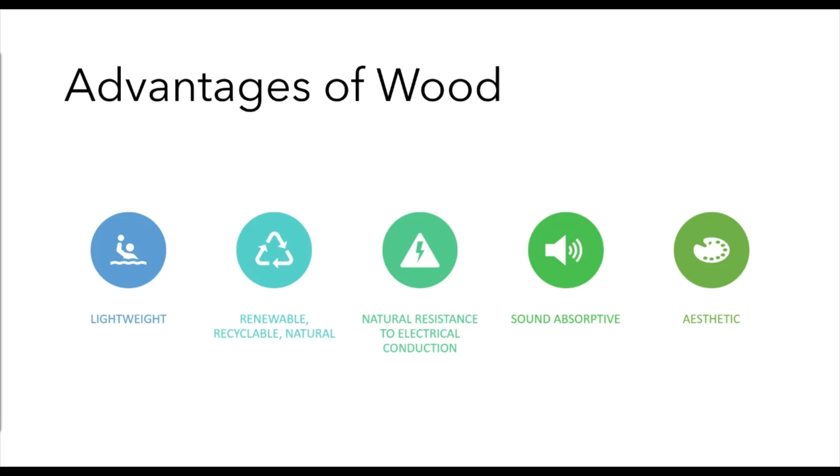when we use wood. Simply put, one also of the advantages of wood is that in terms of tensile strength, it can support its own weight better than metals, for example. What are the disadvantages naman? So, number one, even if ang advantage niya is hindi siya conduit ng electricity, it's flammable. And it's also susceptible to rot and insect damage.

And it has size irregularities. What do I mean by that? Because it is a naturally produced item, it is cut into size by machines and all that. Therefore, meron at merong tapon. At meron at merong hindi pantay or hindi true to size na production na napupunta sa atin.

Therefore, there are size irregularities, which is one disadvantage but can also be taken as an advantage in a sense na, kunwari, gusto mo ng medyo mas natural na design. So, yung irregularity ng wood mo can also be an advantage, di ba?

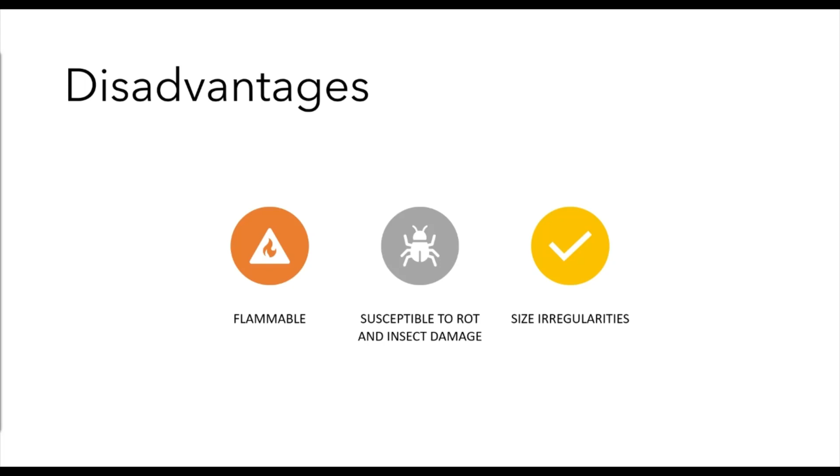Now, before we move on with other things about wood, I'd like to break down lang the difference between fire retardant and fire resistant because these are things that apply most specifically to wooden materials. Fire retardant makes combustible materials difficult to ignite. So taking into consideration wood, when you say it's a fire retardant wood, it makes combustible materials difficult to ignite. It slows the ignition, from the word retardant.

It slows the ignition, burning, or makes the flame self-extinguish. Therefore, in a sense, hindi siya umaapoy. Fire retardant yung material, meaning mabagal, pinapabagal nung chemical na yon. Therefore, in a sense, combustible pa rin yung material, pero mabagal yung pag-combust ng material because it's fire retardant. So, it slows the ignition burning.

And sometimes it makes the flame self-extinguish, as in since slow nga yung process of creating the flame, nagse-self-extinguish siya, nawawala yung apoy. So that's fire retardant. When you say fire resistant, the material itself is non-combustible. Ibig sabihin hindi siya talaga combustible. The material has a barrier against fire.

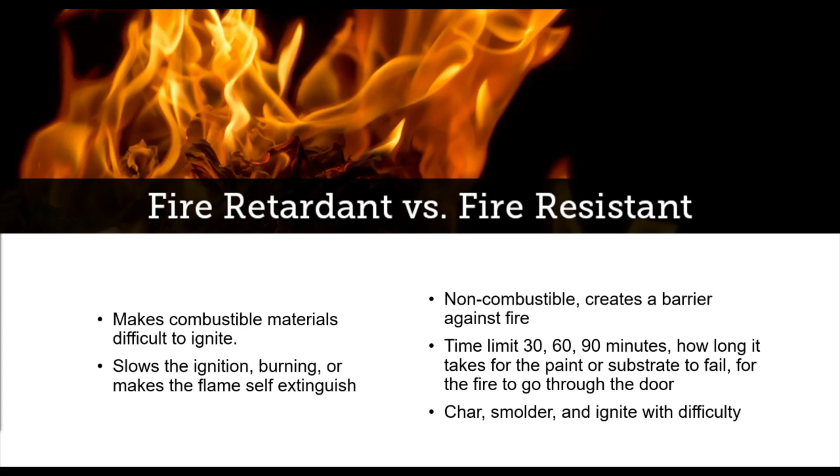Now, moving on, now that we've tackled that, wood construction materials can be classified into two categories. We have your natural wood and your engineered wood. Natural wood comprises, in a general sense lang, your hardwoods and softwoods.

While engineered woods, some of the most popular ones are plywood, blockboard, veneers, laminates, and particle boards, and your MDF and HDF, which we will discuss later on. So, engineered woods are composite wood, man-made wood, or manufactured board. So, those are other terms for your engineered wood.

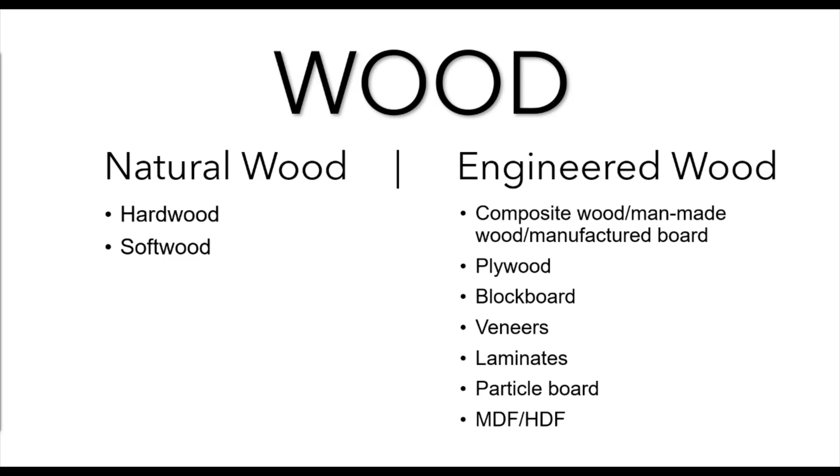Himayin natin, let's start with your natural wood classification. Your hardwood versus your softwood. Your hardwood is denser because it takes more time to form or to mature than your softwood. Therefore, hardwood is denser. And as you can see, ang nakalagay dyan, usually softer yung softwood because hindi lahat ng softwood mas malambot than the hardwood. So don't be confused sa part na yon. There are some softwood na harder than hardwood. The difference is that hardwood is denser than softwood.

Hardwood is usually darker in color. Again, keyword usually, hindi lahat, pero most. And softwoods are almost always light. Hardwood, as I've mentioned, has a slower growth rate, therefore developing more rings and therefore becoming denser. While softwood has loose grain. Grain sa wood, ibig sabihin yung parang texture niya, yung pattern na wavy-wavy. Sa softwood, mas malalaki yung spacing nun. Sa hardwood, mas dense, mas intact, mas compact, mas dikit-dikit yung mga linya. Hardwood has higher compressive and tensile strength compared to that of softwood. And yun nga, close grain for hardwood.

Now, dun sa softwood, nakalagay dyan is higher sap, meaning softwood has higher moisture content. When we say a higher moisture content, mas mamasa-masa siya. Therefore, it has higher permeability. As opposed to hardwood na lower ang sap, therefore lower permeability or yung capacity of water or other materials to pass through the wood.

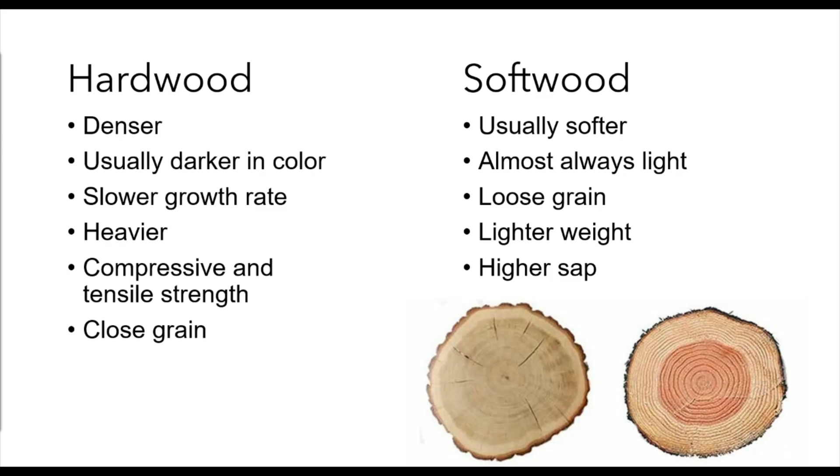Now, another term you should be familiar with in terms of wood is what we call seasoning. Wood seasoning in specific terms. So, wood seasoning is the process of removing the moisture content from wood to minimize structural problems when used in construction. The first and foremost rule ng paggamit ng kahoy is dapat hindi siya basa. Yan ang pinakakalaban ng kahoy, even when you use it na as a finish, is tubig. Therefore, seasoning is a process that removes the moisture before it is said to be fit for construction use.

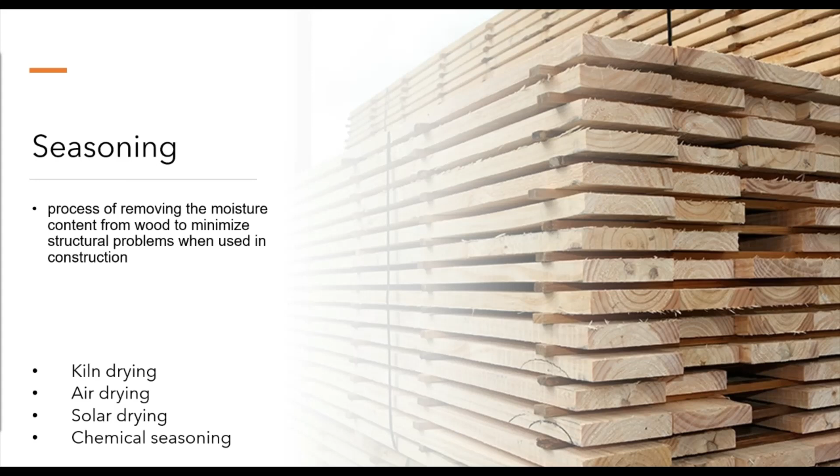Now, I've identified seasoning processes listed below. These are only some of the most used and common ones. So you have kiln drying, air drying, solar drying, and chemical seasoning.

Okay, so these are the graphs. The upper left one is your kiln drying. Ang hirap sabihin. Kiln drying method of wood seasoning. So from the word itself, kiln, ibig sabihin yan oven. So niluluto yung kahoy. In a sense, yun ang general na definition niya. Niluluto yung kahoy sa isang malaking structure na parang oven ang gamit niya. Pumapasok yung heat, lumalabas yung hot air. Ganun lang siya.

Okay, the upper right diagram is your solar drying method. So as you can see sa left niya, merong solar collector panels. And naka-enclose yung structure and then nandun nakastack yung wood sa loob ng structure para mag-dry siya. It's a mixture of air and solar energy. Ayan, solar drying.

The lower left image is what? Your chemical seasoning. So binababad siya, minamarinate yung kahoy with chemicals to treat it, to make it lose its moisture content, to make it protected against water. And then the lower right diagram is your air drying seasoning.

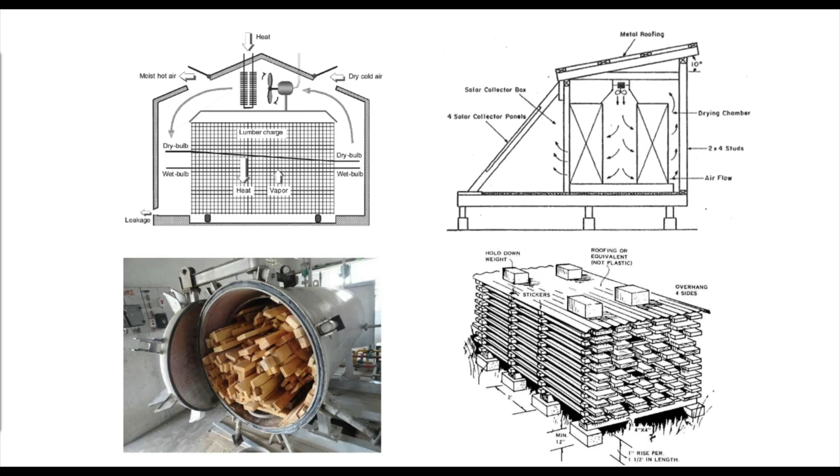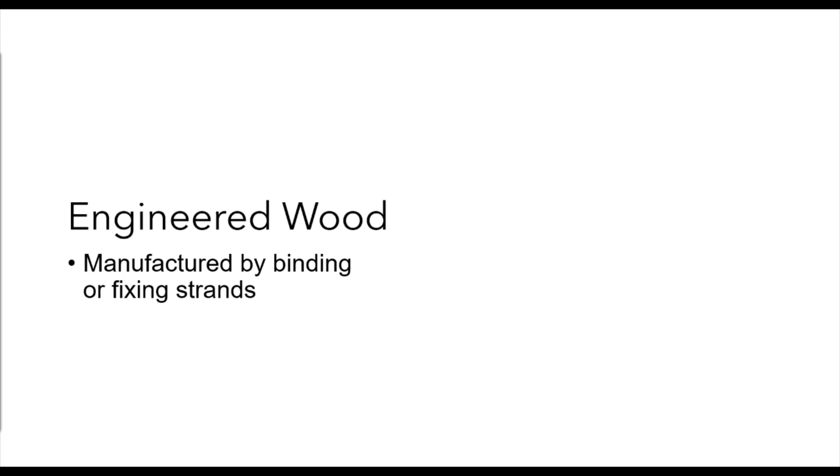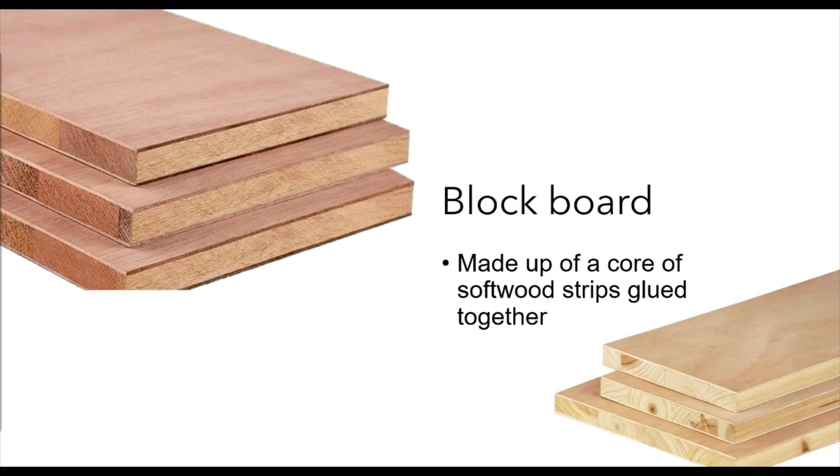Now, a sister kind of engineered wood of plywood is what we call the blockboard. Hindi blackboard na pang school, block as in bloke. It's made up of a core of softwood strips glued together. So, kung kanina yung plywood made of plies, ito block literal or strips glued together. Kita nyo naman yung difference sa itsura nila. So, yung plywood layers, yung blockboard blocks.

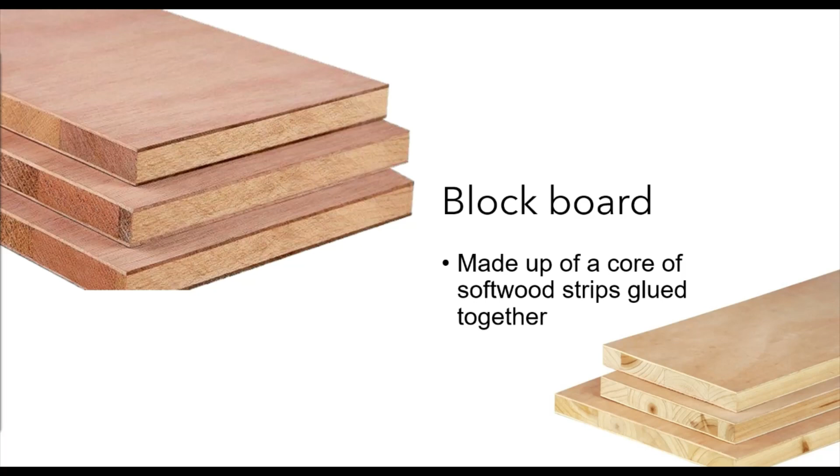Lower right image shows you a more clear or in-depth definition ng block. So, you have parang Jenga. Block 1, block 2, and then 3 and 4. And then for the upper left image, you have your block 1, ganyan.

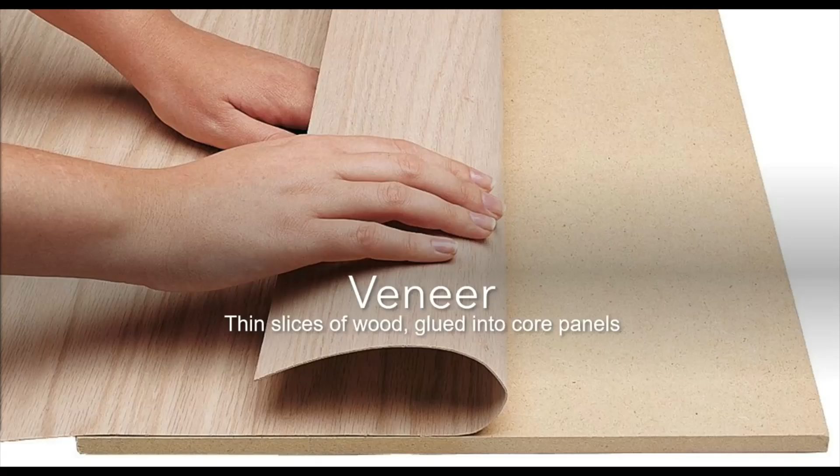The next kind of engineered wood that we will discuss would be your veneer. Veneer, simply put, is the thin slices of wood glued together into core panels. Ang veneer ay peeling. Parang ang process niya is peeling the trunk of the tree. And it's usually thinner than 3 mm, if I'm not mistaken.

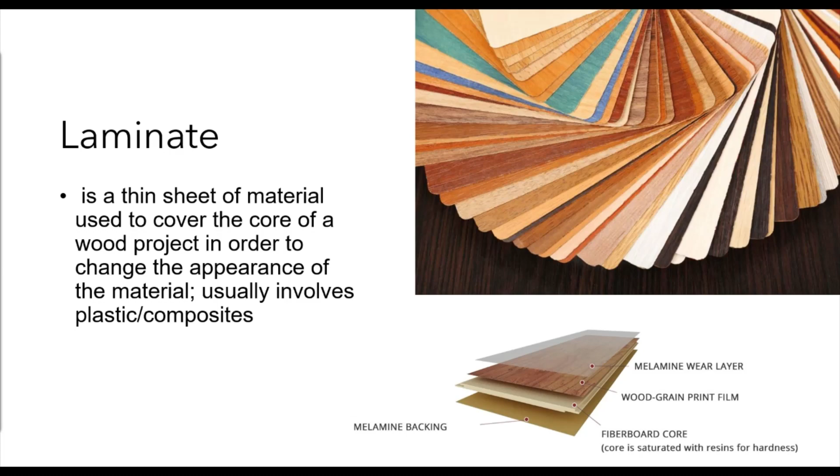The next kind of engineered wood is your particle board. It's also known as chipboard. I'm sure you've heard this. Chipboard because it came from wood chips, shavings, resin, and binders. So, mga scrap, mga tira-tira, mga kuskus, ayan. This is the material usually used for yung mga cheapo na ready to assemble na furniture. So if it's not made from MDF, which I will discuss after, it's usually made from particle board.

The problem with this is that after a few years, since wala siyang structural element component masyado except for the binders, since shavings lang siya, nagwa-warp, nagbe-bend siya over time. And hindi mo siya mapipigilan, lalo na pag nabasa siya, na mag-warp more because kuskus nga lang yung laman niya. So, that's your particle board or chipboard.

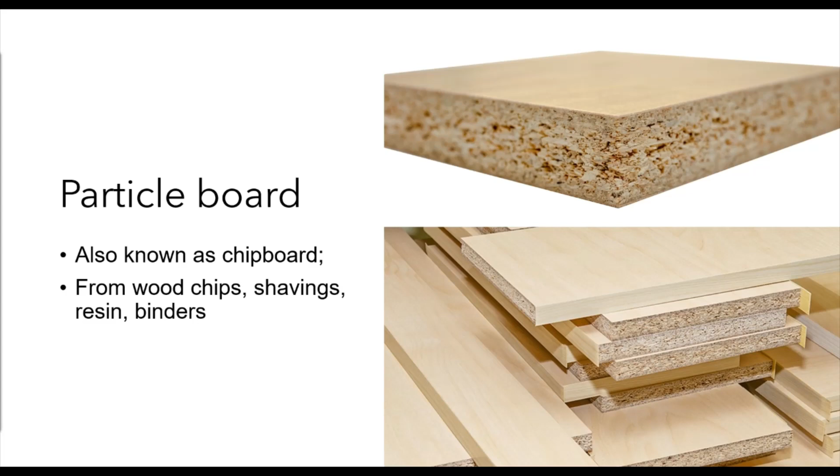Finer and more pressured intact, more, ang tawag dito, more dense ang ating MDF or HDF compared to that of the chipboard, which is why it is cheaper. So, MDF and HDF basically have very minimal differences from each other because they undergo the same process. But HDF is better for building heavy furniture that you use regularly.

HDF board for cabinets, ganyan, more than MDF boards because the wear and tear is better. Ang pag-hold up ng wear and tear ng HDF is better than the MDF. But in terms of how it is produced, there's no technicality in terms of difference. So that's MDF and HDF, and the difference of those two between your chipboard or your particle board. That's basically it for your wood section of the lecture.

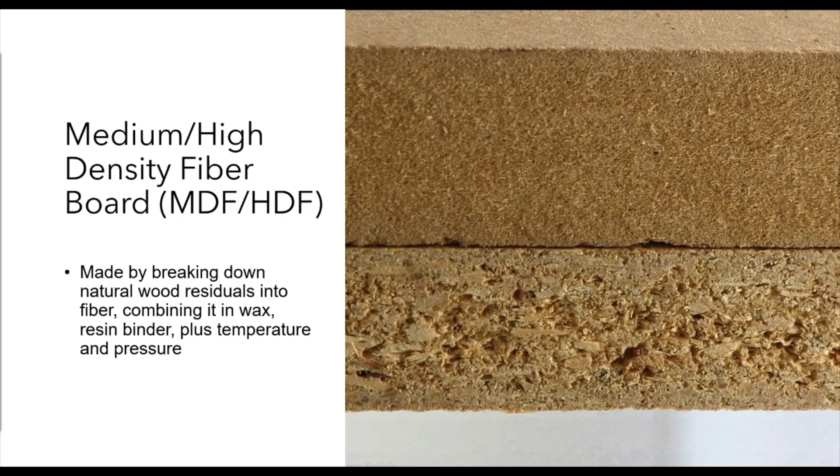Now we go to the stone section of the lecture. Stone as building material. How do we classify a good building stone? We classify a good building stone by looking at its crushing strength, its appearance, of course, as architects, its durability, its hardness, the percentage wear, the resistance to fire, texture, toughness index, and low water absorption.

Now, similar to wood seasoning, ang tawag naman po sa pag-treat o pag-customize, pag-ayos ng bato ay dressing. So, sa wood, it's seasoning. Sa stone, it's dressing. Dressing stone is the process of giving a proper size, shape, and finish to the roughly broken stones when obtained from mining or quarrying. So, dressing, inaayos, pinapaganda. Okay?

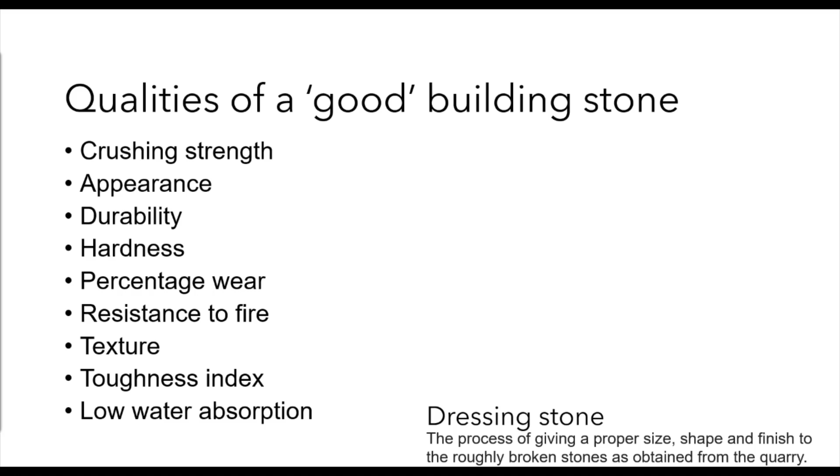Ang pinaka, ang hilig ko magpinaka. Ang pinaka-component lang ng lecture natin in terms of stone is kung saan lang siya ginagamit. So, I think stone is basically used nowadays for masonry.

Let's first define masonry. Masonry is the building of structures from individual units, which are often laid in and bound together by mortar. And the term masonry can also refer to the units themselves. Therefore, kunwari, CHB, that's a masonry unit. The masonry is the mixing of the masonry unit with the mortar. Now, based on the arrangement and degree of refinement, masonry can be classified into either rubble masonry or ashlar masonry.

Now, why are we discussing masonry agad-agad? Hindi pa nga natin na-discuss yung uses of stone as a building material. Now, you should note that stone is used two ways. First, as part of the structure, katulad ng dati, for foundations, walls, columns, lintels, arches during the Roman and Greek era, ganyan. And facework, or to give appearance to the structure.

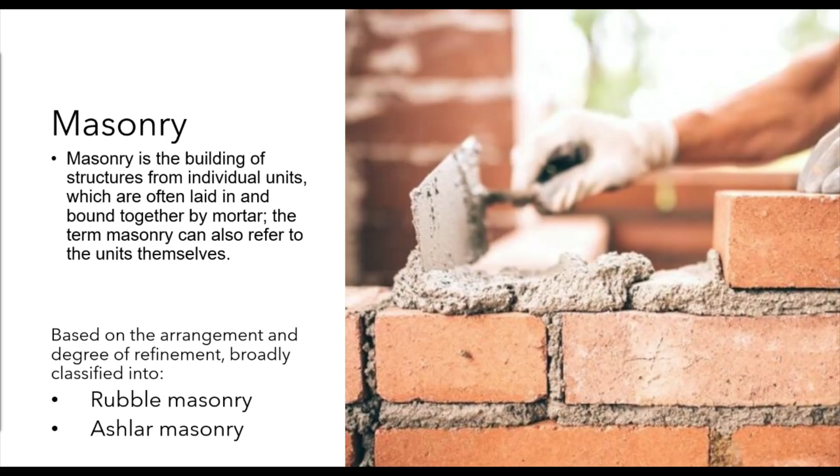Now, we will focus this time on facework or the appearance of the structure, less on the structural capability of stone, because meron na tayong bakal eh. May reinforced column, RC na tayo eh. Meron na tayong konkreto. Therefore, we do not rely solely on stones na. Okay? So, moving on, you have your rubble masonry.

There are 6 types of rubble masonry. So, you can see from the diagrams, you have your uncoursed rubble masonry. As in uncoursed, the weak corners and edges are removed with mason's hammer. Stone blocks are employed. Kita nyo naman sa diagram, it's a random rubble put in place together to create a facework and a wall na conducive. It's basically making the pieces fit each other.

It's the cheapest, the roughest, and poorest form. So, keywords lang tayo. Okay? Then you have your uncoursed squared rubble. Ang difference lang niya, generally, the stones are square and hammer dressed na siya, as in na-dress na yung stone. As I mentioned kanina, the dressing stone, inaayos na, naka-shape na, naka-flatten na yung face niya.

Built to regular course: in this type of stone masonry, uniform height stones are used in horizontal layers. Ang pinaka closest na application nito ngayon would be your brick wall. So, built to regular course, from the word itself, regular.

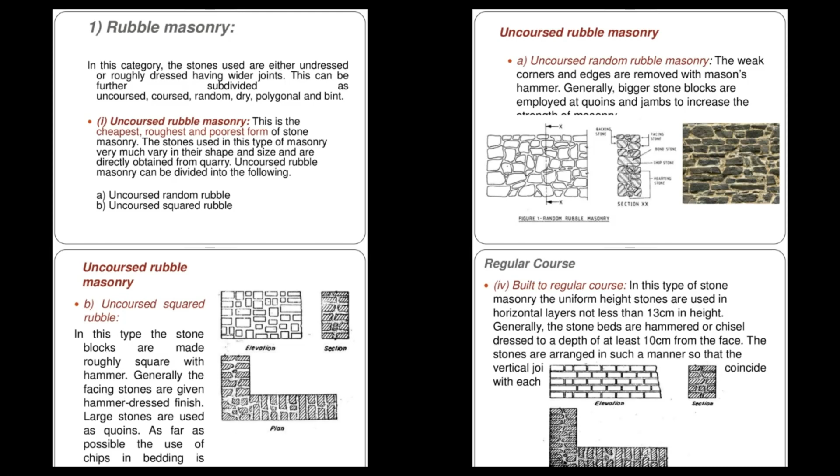And your polygonal rubble masonry. Yung building application niya, for example, is yung nasa left na image. Kita nyo naman, in this type of masonry, the stones are roughly dressed to an irregular polygonal shape. Ayan. The inferior type and the superior type.

But basically, it's just dressing the face of your building to have various polygonal shapes, and then yung edging niya would have regular shapes. So yun lang yun, polygonal rubble masonry.

Your flint rubble masonry is a type of masonry used in the areas where flint is available in plenty. Now, ang flint stones po ay yung medyo mamilog-milog pero classified pa rin as polygonal na kind ng stone. This is a general definition na. So, wag nyo masyadong effortan ito. These are only the types of masonry finish na common para lang you have an idea of how you can employ face work when using stone.

But there are a lot of stones na ready-made na ididikit mo na lang, which we will discuss later on, also called engineered stone. So, para lang familiar kayo with the types of masonry. Okay? And then you have the ashlar masonry. If your rubble masonry is made with usually semi-dressed to undressed stone, your ashlar masonry is made from accurately dressed stones with uniform and fine joints.

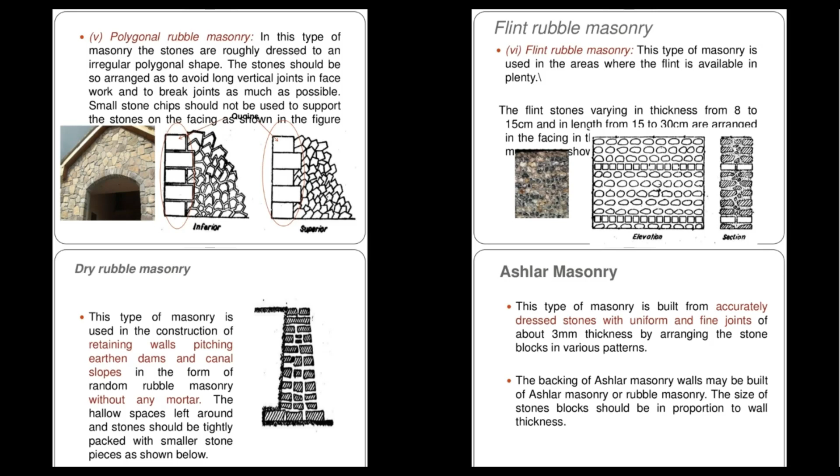See, I don't know why dinaanan ko pa isa-isa yung rubble masonry when I can just say their main difference is that dressed yung ashlar and then undressed stone yung rubble. Kasi nga rubble. Okay? Move on tayo. Next slide. This is actually the last slide for this lecture.